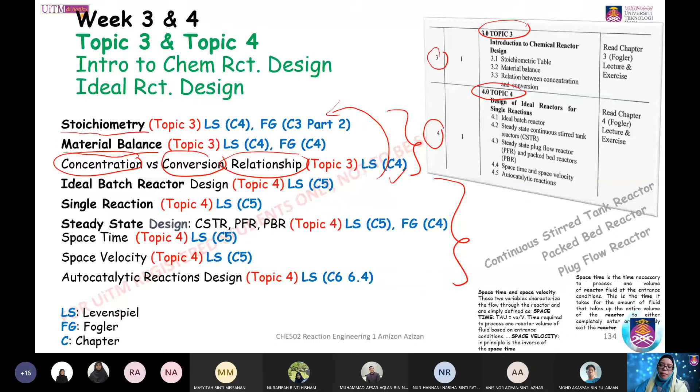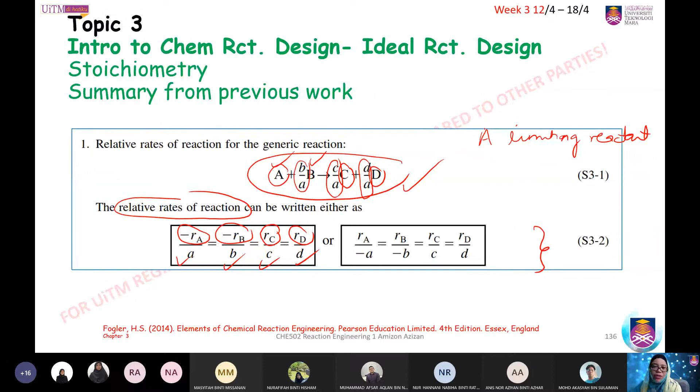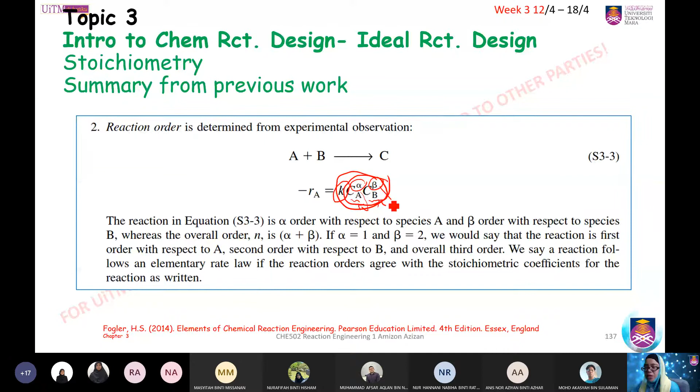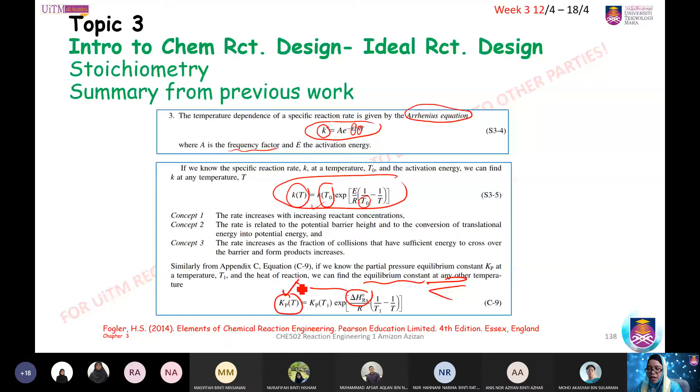And for the equilibrium constant, knowing the heat of reaction, which is delta H_rx, that is the heat of reaction, and also knowing the other temperature.

So this is what I mentioned earlier that I took from the 5th edition. Even though I wrote here 4th edition, the contents are actually the same, 4th and 5th. It's just how it is being represented. It's much more improved in the 5th edition, whereby we have concepts 1, 2, 3 elaborated here.

Showing concept 1, saying that the rate increases with increasing reactant concentrations. Let's say if you have two reactors, this is just to elaborate: the concentration of A, of course both having the same reaction, but just to compare CA1 and CA2, let's say CA1 is not the same as CA2, but with a constant temperature.

So therefore, the rate A for 1 and 2 also differs. So it says the rate increases with increasing reactant concentration, meaning as the initial concentration of the specific limiting reactant is higher than the other condition, you should expect that the rate of reaction for the higher concentration of the limiting reactant is much higher.

Yeah, it's proportional to the increasing reactant concentration.

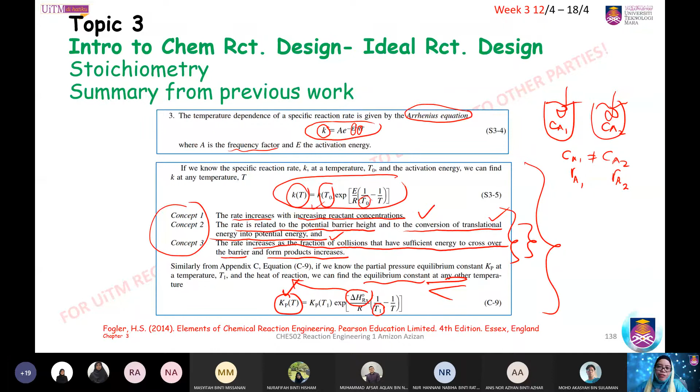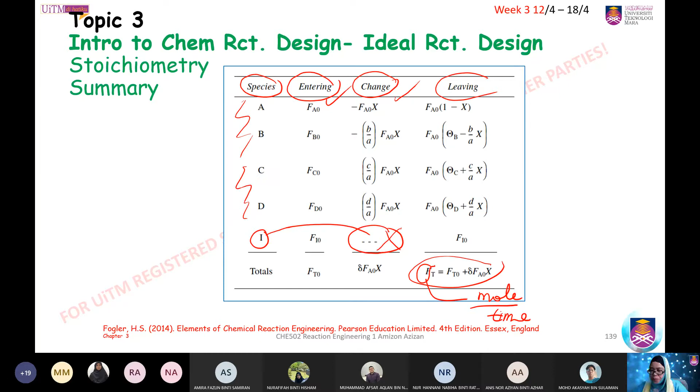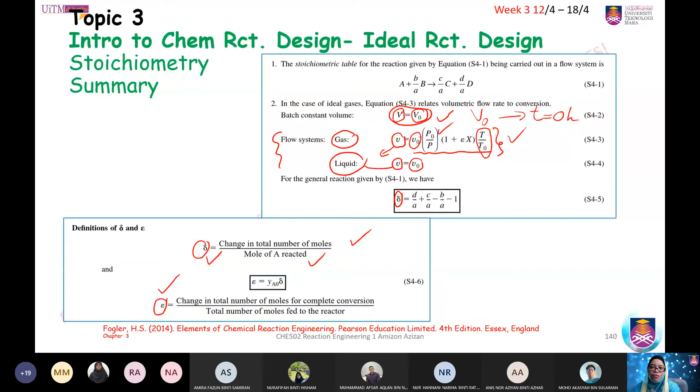The delta is the change of total number of moles per mole of A reacted, and the epsilon is the change of total number of moles for complete conversion over the total number of moles fed to the reactor. So those two symbols, you will see in the stoichiometric table later on.

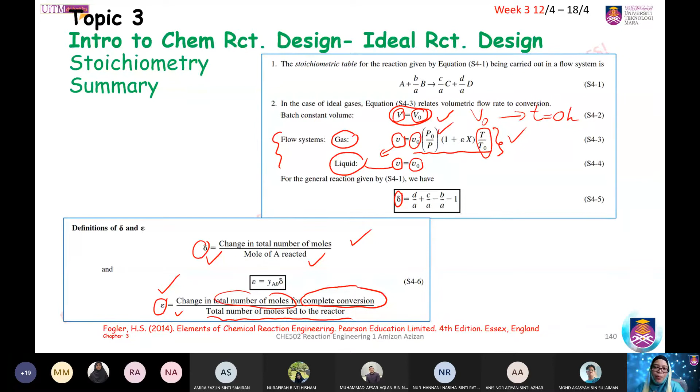This is again another few summarized formulas that you will be seeing as the conclusion from our lesson in topic 3, based first on incompressible liquid, second for gas phase reaction.

So therefore, it means that you should be expecting to learn how to balance the equation for gas phase reactions in a reactor with certain assumptions, and also incompressible liquid, especially when you have this liquid in a constant volume, assuming volume is equivalent to the initial volume.

So those are the few equations which we will be seeing as the conclusion out of the derivation or the fundamental theories. Equations S4-7, 8, 9 and 10 are the formulas for the concentration of the components in gas phase reactions.

Take note that we will be using certain simple formulas as a starting point to write the theories. For example, a very common one: the concentration of any species is equivalent to the feed rate or flow rate per unit, this one being volumetric flow rate. Same goes for the batch system, where C is equivalent to N over V. If it's A, then NA over the volume. That is also another common equation you may want to remember.

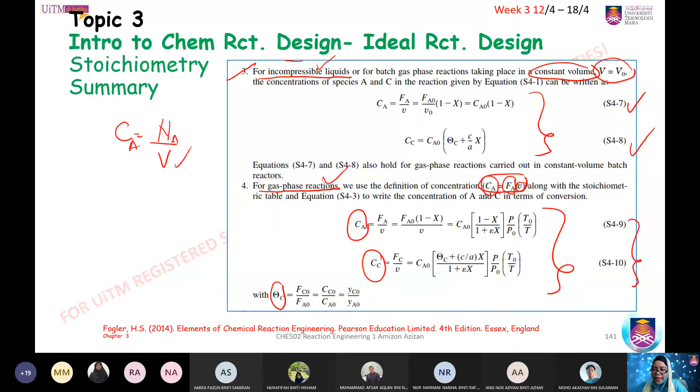You will also see another symbol there, theta, but we will look into that once we are in the slide. In the 4th edition, but not in the 5th edition, we have this kind of overall overview of the equations related to topic 3. Take note that in the 5th edition, topic 3 is found in chapter 4, whereas in the 4th edition it's mainly from chapter 3 in Fogler. They just rearranged the numbering of the chapters, but mainly they have the same contents.

I still share this one from the 4th edition, showing you in case you have this kind of example of a chemical reaction dealing with two components, A and B, producing C and D. You should be asking yourself whether the reaction occurs in liquid phase or gas phase. If it's liquid phase, you will follow a series of equations, or the assumptions are different. But if it's gas phase, it will follow certain assumptions based on certain fundamental theories. So take note, we will learn this slowly, one by one.

And of course, for both phases, liquid and gas, you will be asking yourself whether you run your experiment or reaction in a batch system or a flow reactor system. So the question would be, what is a flow reactor system?

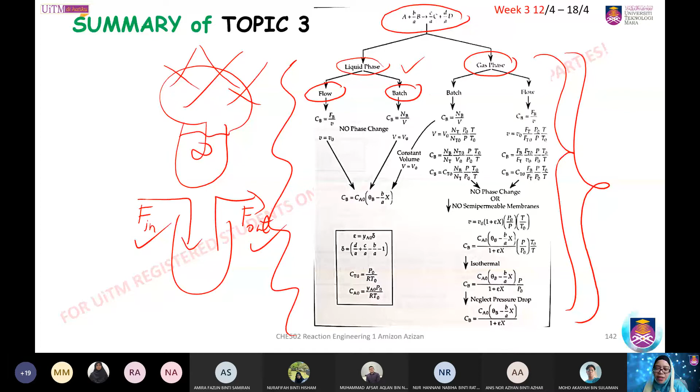But of course, in a batch system, we don't have the inlet F, we don't have that. Outlet F, we also don't have that. It's simply the batch system. So that will be the difference.

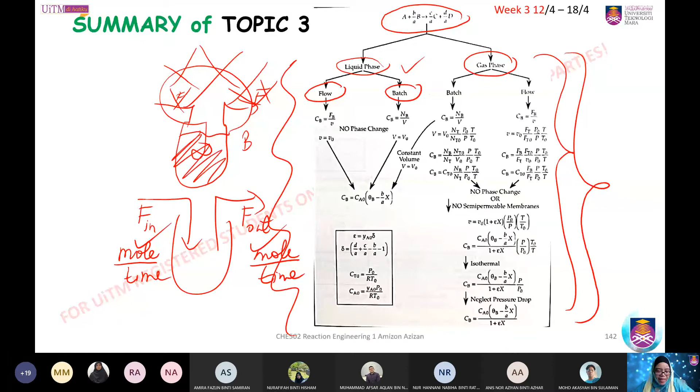Now let's start with the introduction of the stoichiometric table itself. What does it mean? The stoichiometric table represents the stoichiometric relationship between the reacting molecules for a single reaction. So in this topic 3, we will be looking into single reactions, and we want to relate the stoichiometric values from one reactant to the other reactant and to the product. It also refers to the relative rates of the reaction.

Simply by writing the reaction equation, it will represent the batch reaction, for instance, for a batch reactor. Meaning if you know you are running the reactions in a batch system, then you write the equation, or what we call the general reaction equation, accordingly to a batch system, following certain fundamental understanding. You will see about that in the slide later on.

Then finally, you will need to formulate the stoichiometric table, formulating the formulas based on the limiting reactant. Take note, this is another error which I forgot to correct: it should be reactant, not reagent. Based on the limiting reactant, if you say A is the limiting reactant, we will write the stoichiometry based on per mole of the limiting reactant. If it's A, then A.

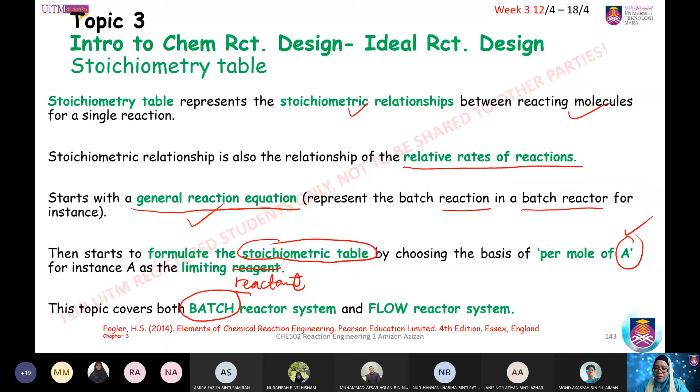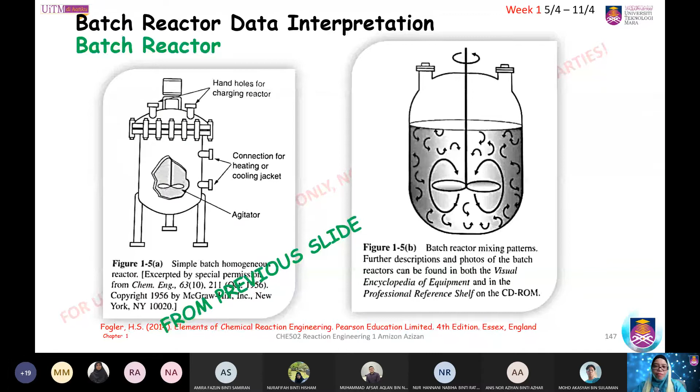Let's say we use this batch reactor system. What happens in the reactor or the reaction mixture? At time 0, the number of moles is considered to be N naught. I refers to a particular reactant - if it's A, then N A naught, the number of moles of A at initial time. We also write this as Ni or NA at any time T. This is what you're going to see in the reaction mixture, along with C, the concentration of the reactants and products.

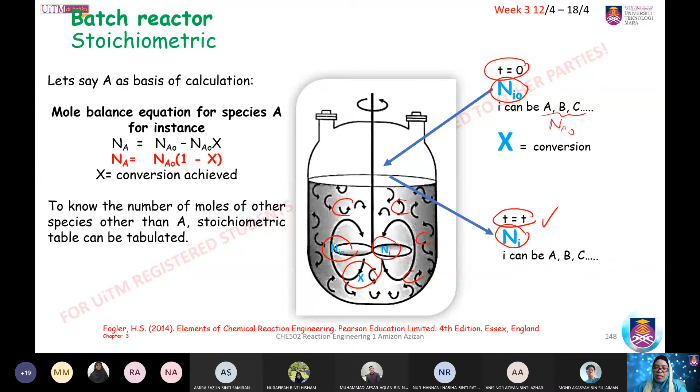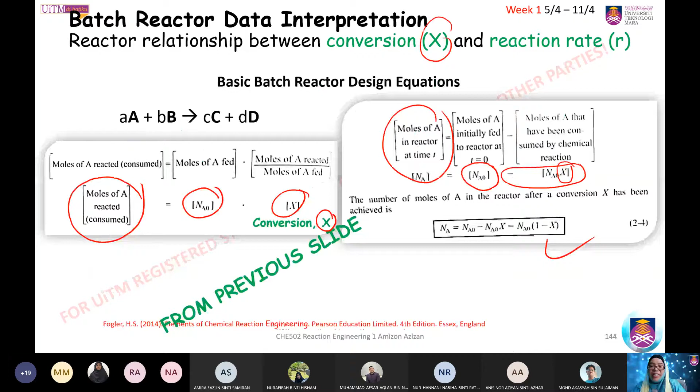Now the question would be, what is the total number of moles of B reacted? Before this, we look at the number of moles of A, which is the limiting reactant, reacted. But if we were to write the number of moles of B reacted, it still depends - we refer to the limiting reactant per mole of the limiting reactant, so A is per mole. Therefore we have these stoichiometric ratios for each component.

So to write the moles of B reacted is simply how many moles of B over the moles of A times - this refers basically to the stoichiometric value here, B over A. B over A refers to how many moles for A, using the stoichiometric values of A and B, since we refer it per mole of A, times the mole of A reacted. This is what you learned earlier - simply the initial number of moles of A times the conversion. So moles of B reacted refers to how much of the initial A being converted times the stoichiometric ratio needed for 1 mole of A.

Meaning to say, whatever moles of B reacted depends on this initial value being converted, times the stoichiometric ratio.

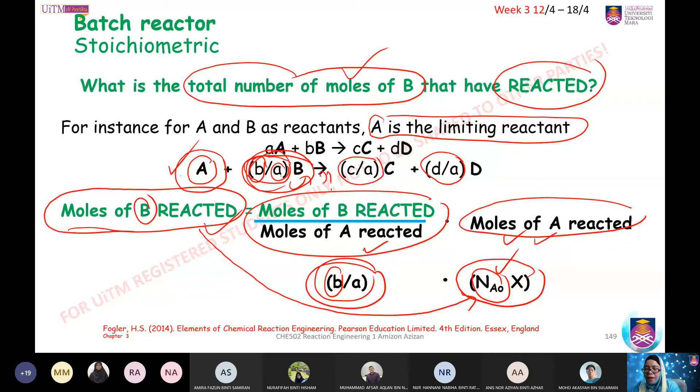The number of moles of B remaining is simply, if we know the initial mole of B, we use that as our reference minus the number of moles of B reacted. Simply write this as the number of moles of B at any time T is equivalent to initial minus the number of moles of B reacted, which is taken from the previous slide.

So before I proceed with the stoichiometry, does anyone have any question before I go further? Yes, Shafika? No, doctor.

Okay, very good. Now we are going to start to write the stoichiometric table. There are 3 steps: first, by forming the columns; secondly, in the columns we identify the inerts - if there is no inert, then you don't have to write inerts there; finally, formulate the total number of moles.

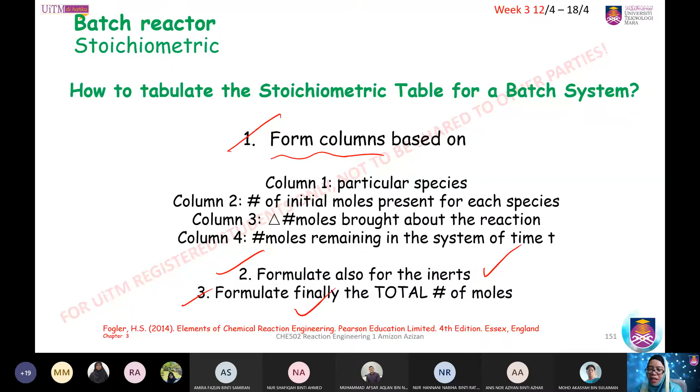So what does it mean by forming the columns? There are 4 kinds of columns, as you see here - column number 1, 2, 3, 4. Number 1 is simply the components: A and B as the reactants, C and D as the products, and then we have I as the inert.

Initial, column number 2, is initial - simply write the formula for initial. In this case, batch, then number of moles of the species: A naught, naught refers to when T equals 0, and B naught, and C naught, and D naught, and I naught.

Then change - what does this mean? Change simply means the number of moles reacted, correct? Change - is that true? If you still remember our previous slide, the number of moles...

Reacted. That's right. Alright. A. Same goes to B.

So we have A minus, meaning we need to deduct it because it's disappearing. Then B disappearing. Then product C plus. It means the number of moles in this case is not reacted, number of moles formed, based on per mole of A. Same goes to D, the number of moles formed. So the change would be either disappearing or forming, moles of disappearance or moles of formation.

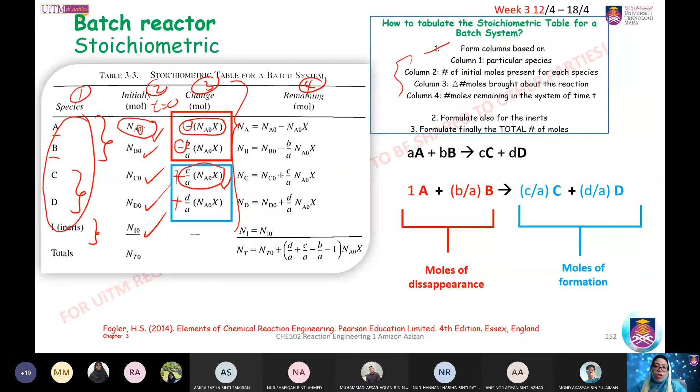Then the fourth column is simply remaining. So remaining is easy: initial minus whatever is disappearing, or initial plus forming. For C, initial plus forming; for D, initial plus forming. Since inert has no change, the initial is equivalent to the remaining. And finally, you formulate the total number of moles as shown here.

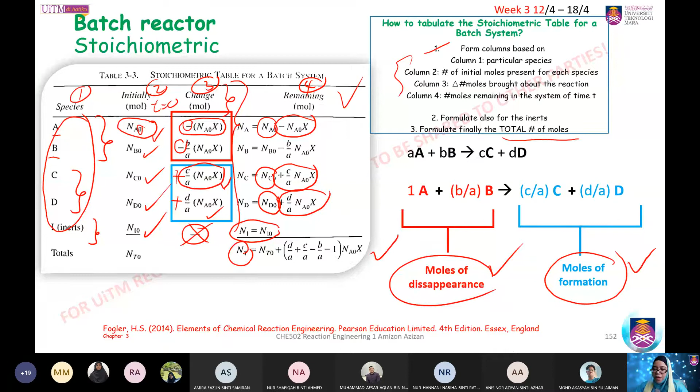So we can also write the total number of moles based on delta. What is delta? Delta is the change in total number of moles per mole of A reacted. So simply, the total initial number of moles minus delta times Na naught X, the number of moles initial times the conversion.

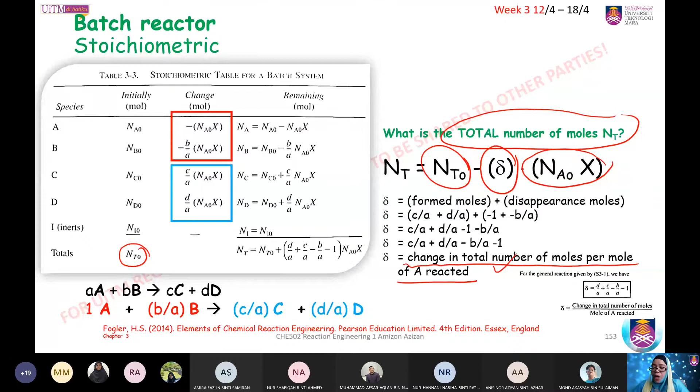And we can also write the stoichiometric table based on concentration. This is what you saw earlier based on number of moles. We know that concentration can be written as number of moles per volume. If it's Ca naught, then Na naught over V naught. Cd naught is Nd naught over V naught. The common formula for concentration is simply Ca as NA over V, Cb as NB over V, Cd as ND over V. Here we just need to replace the formula for the number of moles of A at any time.

That initial minus reacted. Same goes here, NB initial minus reacted. ND initial plus formed. C and C naught, initial plus formed.

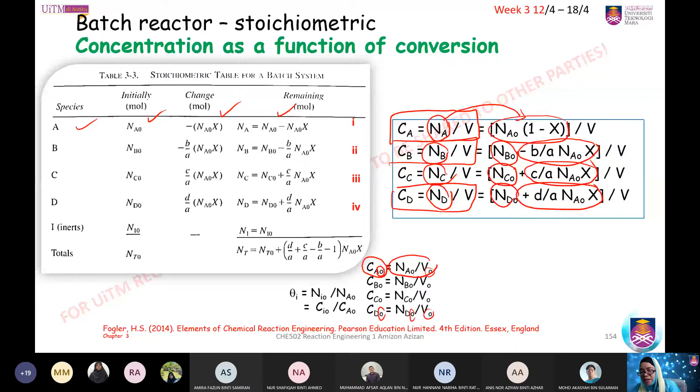In the stoichiometric table, we can also express it not only in terms of number of moles and concentration, but also in terms of theta. So what is theta? Theta is simply the ratio of the initial number of moles to the initial number of moles of the limiting reactant. If we write theta in terms of concentration, it is simply the initial concentration of that component over the initial concentration of the limiting reactant, which is A.

So we have this equation from our previous slide. We are now going to convert this in terms of theta using this principle. If we have n, then we use the first principle, the ratio of n. So how do we do that? If it's theta A, the equation is Na naught over Na naught. If it's theta B, then NB naught in reference to Na naught. So that is theta B. Let's look at this equation for B.

We'll go to the next slide. It should be written clearly, but anyway we can do that here. We have this NB, and how to relate that to theta B. Since theta B is NB naught over Na naught, what we can do is divide this by Na naught and multiply this by Na naught, then we can simply cancel that out. Then it will give you theta there, NB naught over Na naught.

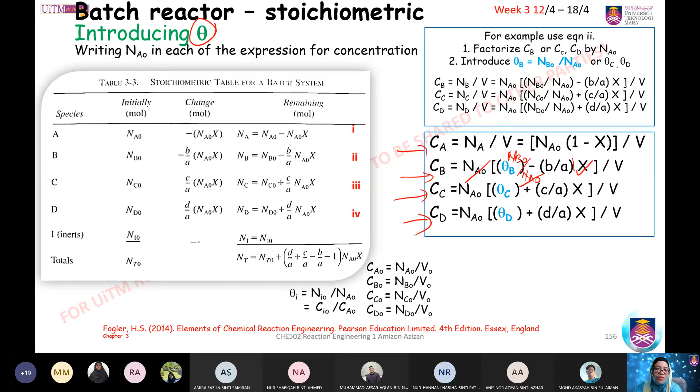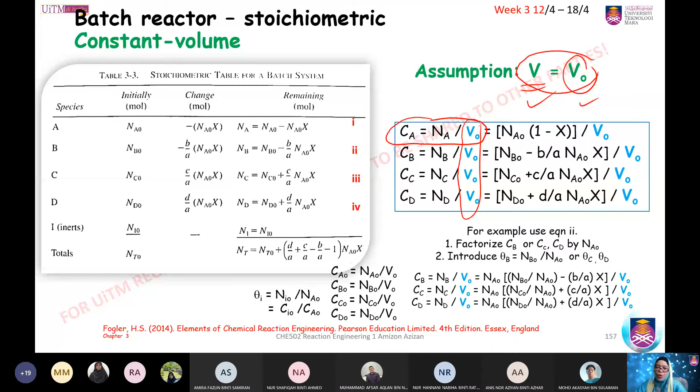Now, what do you mean by constant volume? We have 3 kinds of scenarios which illustrate the constant volume condition. The first one: if it is a sealed constant volume vessel with appropriate instruments to measure P and T, meaning at that pressure and temperature in a sealed constant volume vessel, then the reaction is operating in a constant volume condition.

For a gas phase isothermal reactor, if the reactor is set at constant temperature, for a gas phase we can say the number of moles of the reactant is equivalent to the number of moles of the product at that specific temperature and pressure.

The third one is liquid phase organic reactions. Most of these do not change density, meaning for constant volume, it means constant density. That is why all the equations you have, NA over V, now becomes NA over V naught, just to rewrite the equation showing a batch reactor system with constant volume.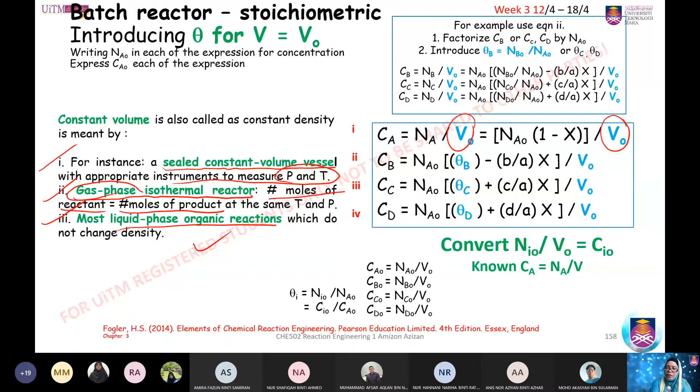So this is the same table. We'll skip to the other one.

Now we want to re-express the equation. We have the left-hand side as concentration, the right-hand side with N and also V. What happens if we convert NA over V as C? Knowing C is equivalent to NA over V, we can do that. So look at that: NA over V, NA over V, NA over V.

So we can re-express that as NA naught over V naught, now defined as CA naught. So we write CA naught for each of the equations. What can you see here? It means the concentration of A depends definitely on the initial concentration of A.

Same goes for B: the concentration of B also depends on the initial concentration of A, since A is the limiting reactant, multiplied by theta and what is consumed. The concentration of C also depends on the initial concentration of A, because A is the limiting reactant—for each mole of the limiting reactant, how much C is formed, how much D is formed, how much B is reacted, how much A is consumed, then CA.

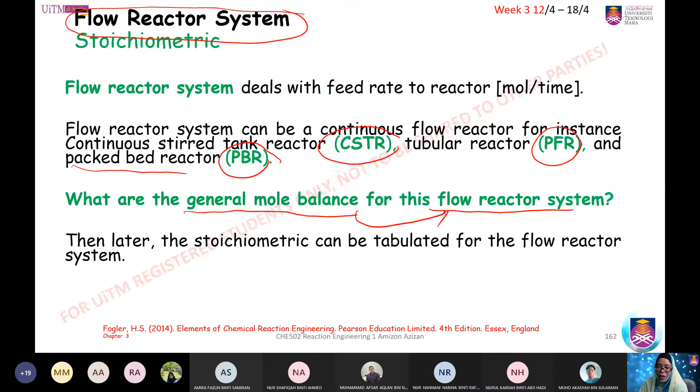If we are using CSTR, which is continuous stirred tank reactor, then it's mainly suitable for a liquid phase system. Then we can make an assumption that it reaches its steady state, because we want to simplify things, we can solve certain findings or determination based on steady state so that it's much more simplified, not so much complex. And if we have this impeller thing, the impeller is meant to mix the reaction mixture homogeneously. Therefore, it reaches its ideal stirred, continuous ideal reactor, ideal CSTR, which is assumed to be perfectly mixed due to the impeller or agitator.

When this happens, the concentration—I want to erase something, hold on. The concentration at any position, I cannot. Hold on, I want to erase something. I want to erase this one.

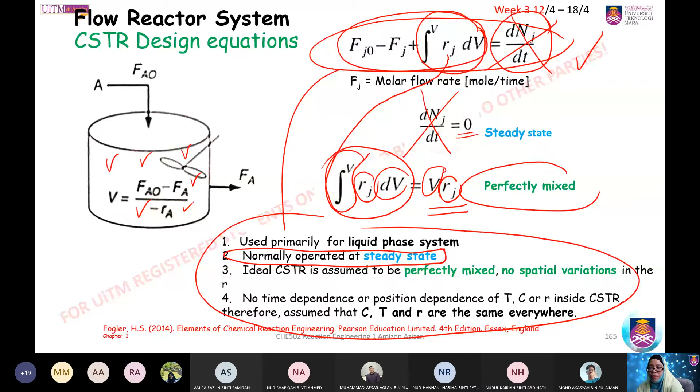Now, having that equation, we cancel that out. We simplify this to here. Then we have that simplified equation. From that equation, we can define the volume for that CSTR. The volume is simply the flow rate inlet minus the flow rate outlet over the rate of reaction, minus rate of reaction, which is the rate of disappearance of certain component.

Now, please also remember how to write the flow rate. In this case, since the F, whatever comes in, is in mole per time, we call it molar flow rate. It can also be written in terms of upsilon, which is volumetric flow rate, volume per unit time, like cubic meter per hour, let's say. So that is volumetric flow rate.

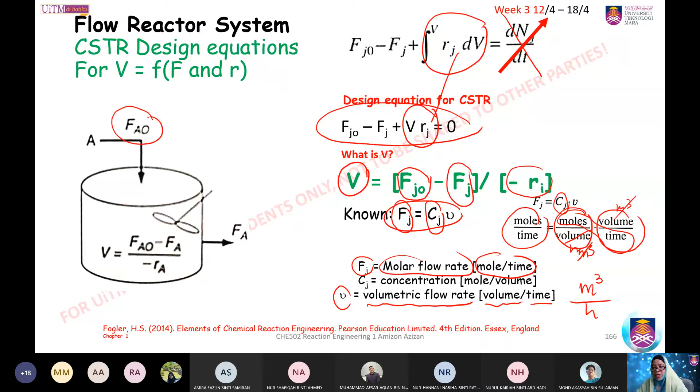So the F, the molar flow rate, can be written as concentration, which is mole per volume, times volume per unit time. In this case, mole per meter cube, then meter cube per time. So simply cancel that out, then you get mole per time, which is equivalent to molar flow rate. So please also know how to write this molar flow rate formula in terms of concentration and the volumetric flow rate.

Now, having said that, we simply replace the F based on C and upsilon. Then if it's not, then simply you have upsilon naught, then CA naught. Here we don't have naught, then you don't need to put the naught. Simple.

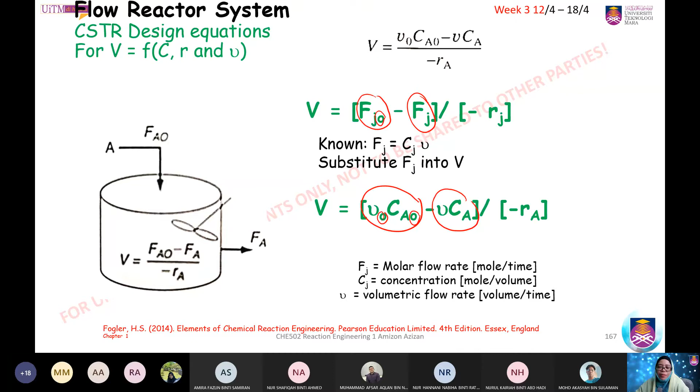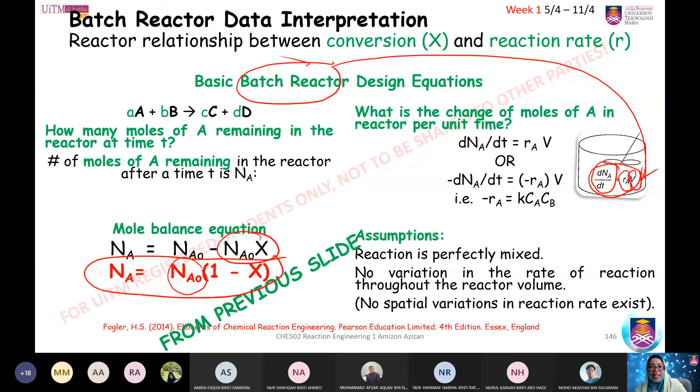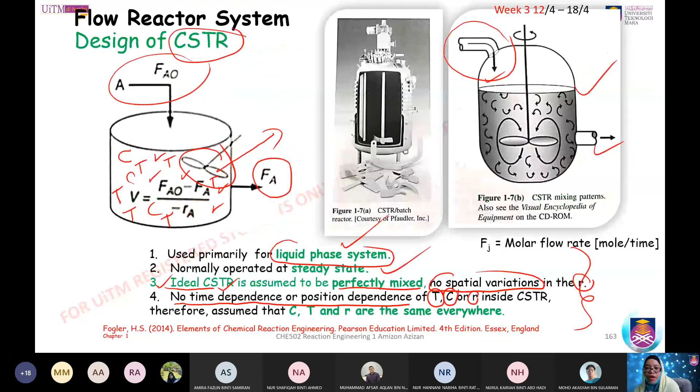Remember, for a batch system, we say the change of number of moles is equivalent to RA times V. That is for batch system. But for flow system, it's not the change of number of moles, but the change of flow rate, right? The change of the flow rate of the component per the change of volume is equivalent to rA. In this case, dFA is equivalent to RA dV.

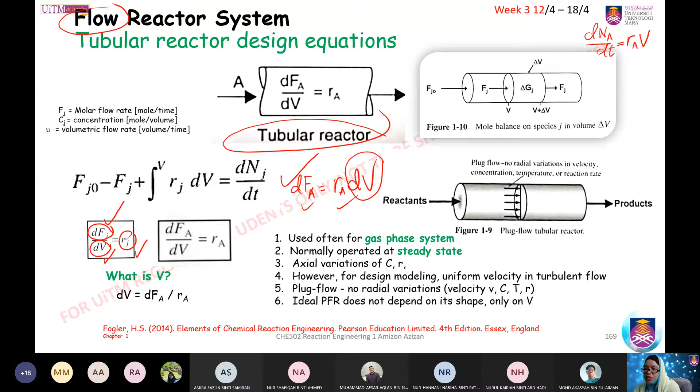Another basic equation considering A for a flow reactor system is: molar flow rate at which A is fed to the system, which is FA0 inlet, minus molar flow rate at which A is consumed, the FA0 times X consumed, is equivalent to molar flow rate at which A leaves the system.

We have FA0, then we have FA. Whatever happens here is the change, which is minus FA0 times X - the initial amount of A times how much A is being converted, which is X. Now that can be written as FA0 times x. This is the definition of x, and this is FA0, so you can simply write the equation accordingly.

What else? Please remember this: the molar flow rate is a function of concentration and also upsilon, which relates to the volumetric flow rate. If we have naught, then the whole thing changes accordingly. If we don't have naught, then there is no naught involved.

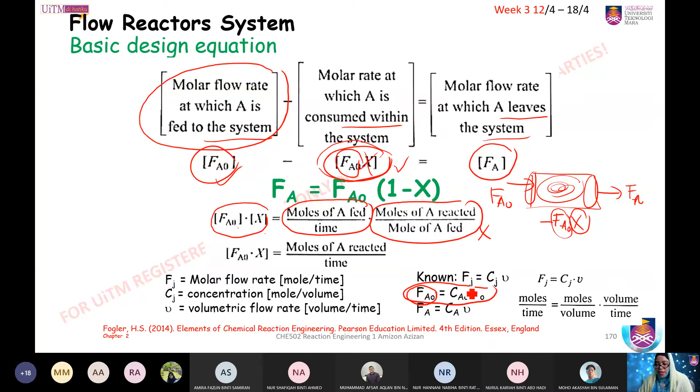This slide shows you the basic design equation again for the flow reactor system, but we are going to relate it to a gas system, for example using the ideal gas law.

This is the equation for the ideal gas law, and you know that N over V is C. If you rearrange that, C is equivalent to the partial pressure of that component over the universal gas constant times the temperature. If it's initial, then everything becomes T naught, partial pressure PA naught - the partial pressure of the species at initial time. Of course R stays the same because R is the ideal gas constant.

So the initial molar flow rate can also be written in terms of partial pressure and RT according to the ideal gas law. This is simply re-expressing it.

But then we have this Y. The Y refers to the entering mole fraction, YA naught. If we are referring to naught, it means entering. The entering mole fraction of A times the total pressure P naught over RT, and also upsilon, which is the initial volumetric flow rate.

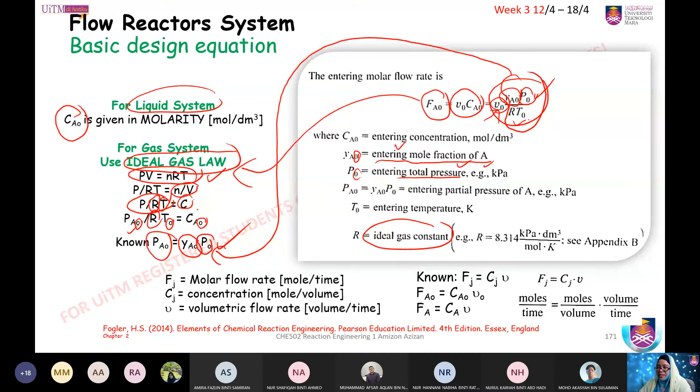Effluent means leaving. The other word for entering is influent, used as entering or inlet. If you say effluent, it means the leaving stream from the flow reactor.

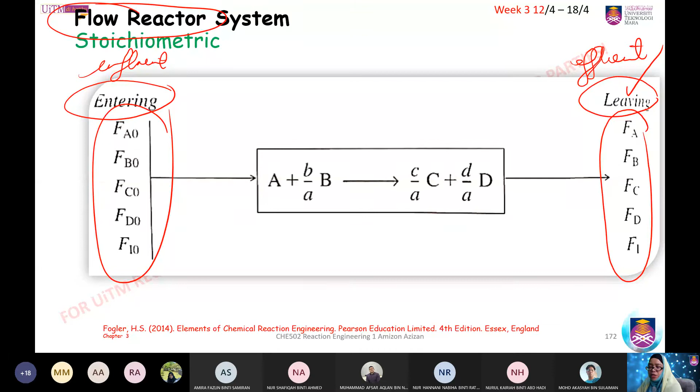So the effluent rate is simply the initial minus the change. You do that for each condition. Take note for the reactant, we have the minus because it means the disappearing moles or disappearing rates. For product, we have plus, the forming rates.

Now, for the flow reactor system, we can write in terms of molar flow rate and also the volumetric flow rate, and relate it to the concentration. Here, we simply rewrite FA, FB, FC, FD in terms of A naught, B naught, C naught, D naught, because those are referring to the initial minus changes. The changes depend on the conversion and also the initial of the limiting reactant.

So these are all the same as the batch reactor system. When you write your stoichiometric table, remember in batch reactor system we have this as volume. But for the flow, instead of volume, we use volumetric flow rate, which is the upsilon. So that is why you see upsilon there.

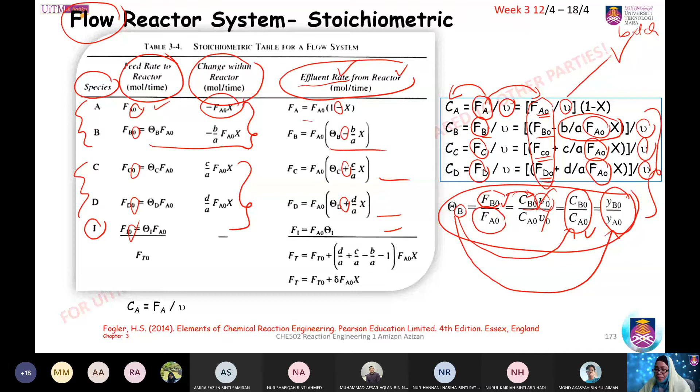Now, we want to refresh our understanding on a batch reactor system. Like I told you, for the batch reactor system, we refer to volume. Then we express that in terms of theta when we assume volume is equivalent to V naught, the initial volume. And we also re-express NA over V naught in terms of CA naught.

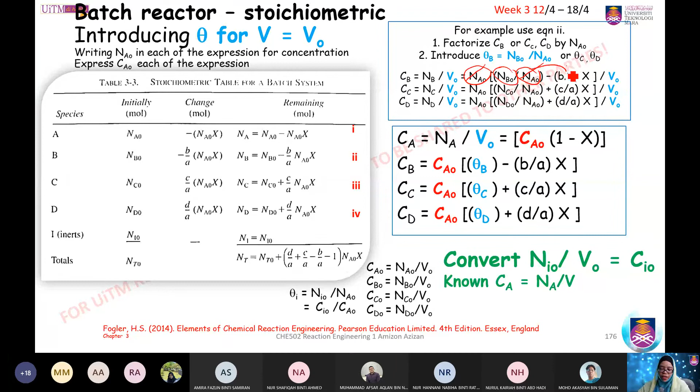For the flow phase, we can also express that in terms of theta, whereby we divide each term by the volumetric flow rate, upsilon. Once we do that, we also have theta B, theta C, theta D in the equation of the flow rate. This is done as we have been doing here, whereby we introduce NA naught to each term, so that we can use the definition of theta. We do that as well for the flow reactor system.

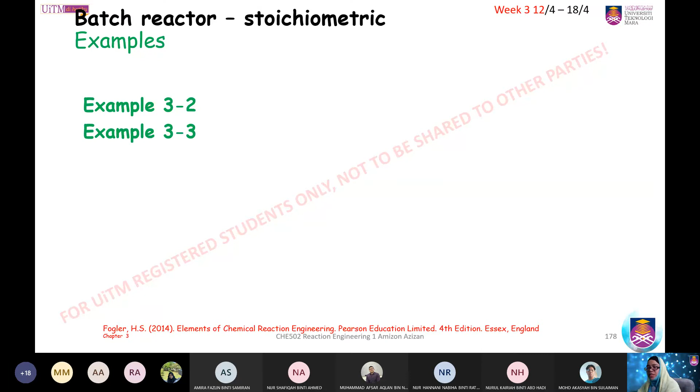So that would be the examples I recommend you look at in the 4th edition, examples 3.2 and 3.3. I haven't looked at the 5th edition, but you can try first with example 3.2, an example of a soap consisting of sodium and potassium salts with various fatty acids - oleic, stearic, palmitic, lauric, and myristic acids - with the assumption that volume is equivalent to the initial volume. When we want to produce soap, we use the saponification principle, using aqueous caustic soda and glycerol stearate. Caustic soda is sodium hydroxide, and glycerol stearate is a source of glycerin, which can come from oil. From the saponification process, it produces soap, and finally glycerin.

So now the question asks you to assume X is the conversion of the sodium hydroxide, which is the number of moles reacted per moles of the sodium hydroxide initially present. Let me see what the question is.

Letting X represent the conversion of sodium hydroxide reacted per mole of sodium hydroxide initially present, set up a stoichiometric table. So it asks you to form your own stoichiometric table, expressing the concentration of each species in terms of its initial concentration and conversion X. You use this definition of X. The question says the sodium hydroxide is the limiting reactant. It says the conversion of sodium hydroxide is moles of sodium hydroxide reacted per moles of sodium hydroxide initially present. So please form this stoichiometric table. You can try that on your own, or do you want me to bring you to your breakout room? Do you want to discuss it with your friends?